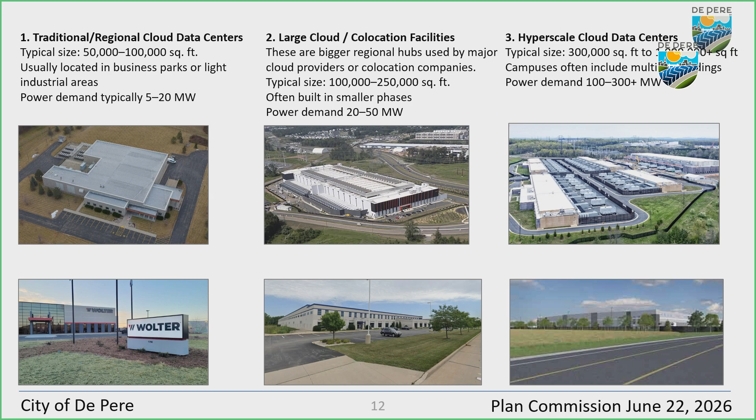So we take a look at where those would fit within the zoning code. Again, we have a low, moderate, or high impact classification. We would probably classify them as falling into that higher impact category, the hyperscale data centers. The traditional regional centers or the large co-location facilities would probably fall within a moderate impact area.

Our zoning code does authorize the zoning administrator to place them in those categories, because we don't have a specific spot in our zoning code for data centers of any scale or size. It's meant to be as high level and categorically situated as possible. When we drafted this, the proliferation of data centers wasn't where it is today. So if we do come back with something, it would probably be with a more detailed and finite approach defined, so we don't have that loose definition.

If one came in today with any proposed size and scale and we placed them into a zoning district and they wanted to challenge that, it would come to you as the Plan Commission. So I just want you guys aware that our interpretation does exist for a reason, but there are avenues if they don't agree with the interpretation. And if they don't agree with your interpretation, then it goes to the courts. So just want to make you guys aware that there are avenues.

But in this case, again, we don't have a specific line item in our zoning code for data centers, so we would likely classify them into one of these 3 categories. And again, this is just our loose discussion of where they would likely fall. So coming back to this, where would that fall within the city?

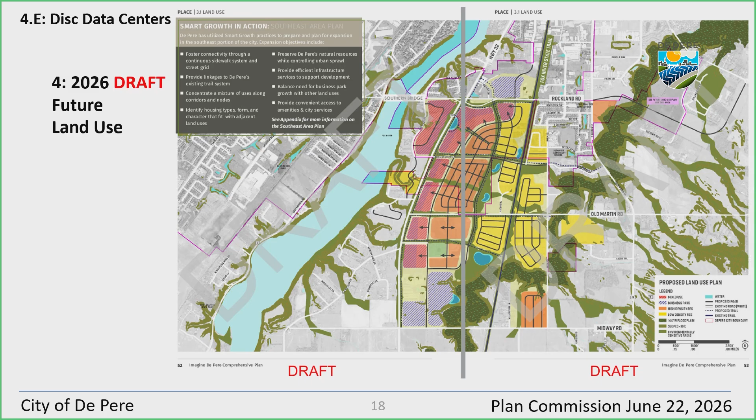The moratorium is a very specific tool authorized by the state in the state statutes, and you have to follow very specific standards. A moratorium must be tied to a legitimate government purpose. You can't just put a moratorium out there because you don't like a development.

It has to be temporary and reasonable. You can't just go after one targeted user—it has to be for a classification. So if somebody comes in and says, I want to do something, you can't then retroactively throw a moratorium in their way. It has to be thought out and planned. It cannot conflict with the state statutes, and it must be consistent and non-discretionary, non-discriminatory in its use.

And so with that, if we want to have the discussion here tonight, if you wish to move forward with it, we would come back in July with an actual proposed ordinance that you could then forward on to the Common Council. At that point, there will be a 30-day public hearing component tied to it, and then if ultimately the council wants to adopt it, it would then be adopted. We would tie it to that 12-month time frame.

This gives us the opportunity to evaluate and finish the comprehensive plan, but also do additional research into the regional impact for a data center. When I say data centers, it's probably in our best interest to investigate even the smaller scale data centers in greater detail, because they'll start to grow as well. These cloud-based data centers are probably going to grow over time, but maybe not to the scale of a hyperscale data center. So with that, staff is available for comments and any questions.

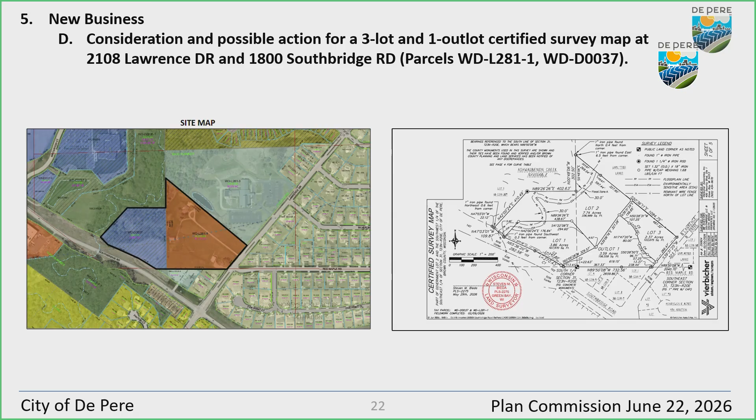New business, Item E, consideration, possible action for 3 major design exceptions from Zoning Ordinance Sections 1491-3A, maximum minor materials for surface areas, 1491 Table 9.1, allowed major facade materials, and 1491 Table 9.1, allowed minor facade materials at 2015 Venture Avenue, parcel WD-D0077.

Peter, thank you. This is for a proposed development on Venture Avenue. There are 3 buildings on this proposed site. A formal site plan has not been submitted yet. The applicants are requesting a potential design exception so that they can proceed with designs for their buildings. This particular site has 3 buildings on it: one is an office and warehouse, and the other 2 buildings are warehouses.

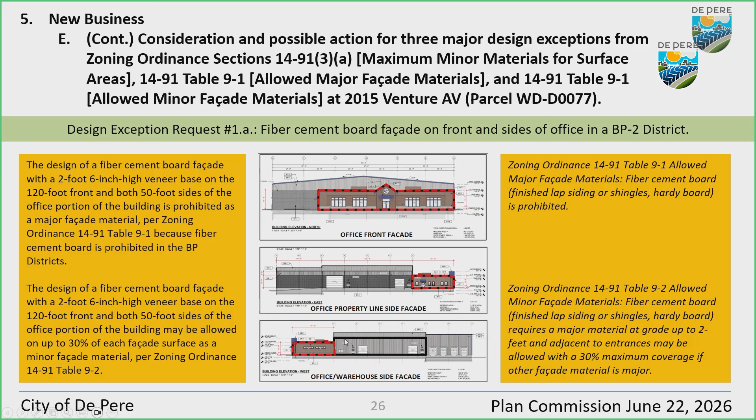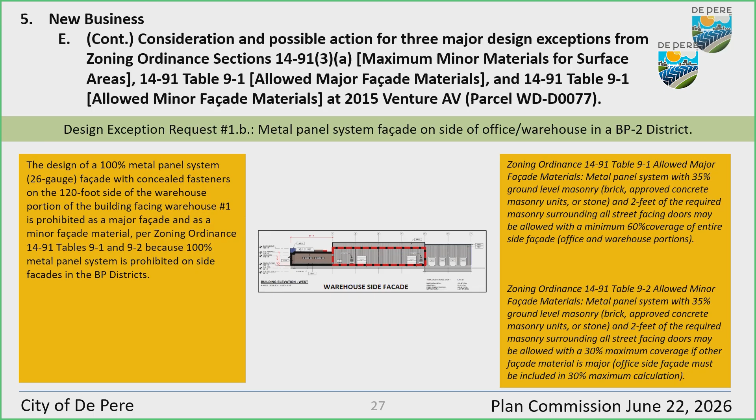Moving to design exception number 2, the middle building referred to in the site plan as warehouse number 1. On the two facades, the front facade uses masonry and metal above it, exceeding the minimum requirement. So the front facade is okay, and the masonry wraps around about 30 feet on each of the two sides of the building.

That's where you can see the dark area around the overhead doors, which is completely allowable. As it continues, the remaining area, outlined in red on the two sides, can have metal with only about a 2-foot base for up to 30% of that facade. The rest needs to comply as a major facade material, but 100% metal doesn't meet that criteria. That is the number 2 design exception request.

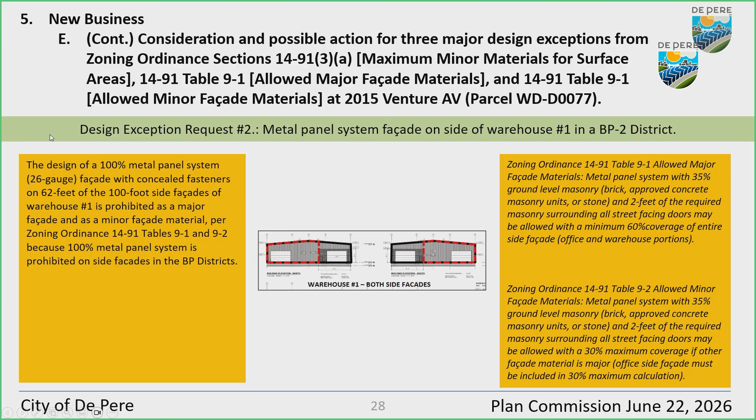Very much like number 2, request number 3 is for the third warehouse, identified as warehouse number 2 in your site plans. The southern end building has masonry going all the way across, which is fine. The space in between the two buildings has the same scenario as the other warehouse, with 100% metal on that two-thirds area. I want to point out that they used more masonry than required on the street-facing facade, which is part of the reason they're asking for the 100% metal.

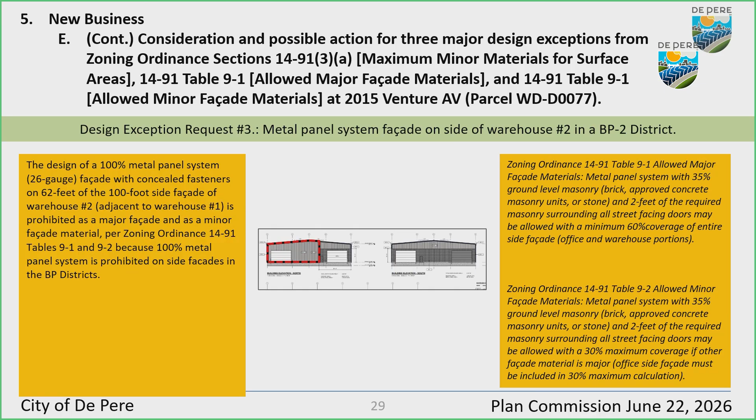From a zoning code standpoint, I can't approve it because they used more masonry in one area and less in the other. Those are the three parts of the design exceptions being requested, and I think that's the end of the slides I have.

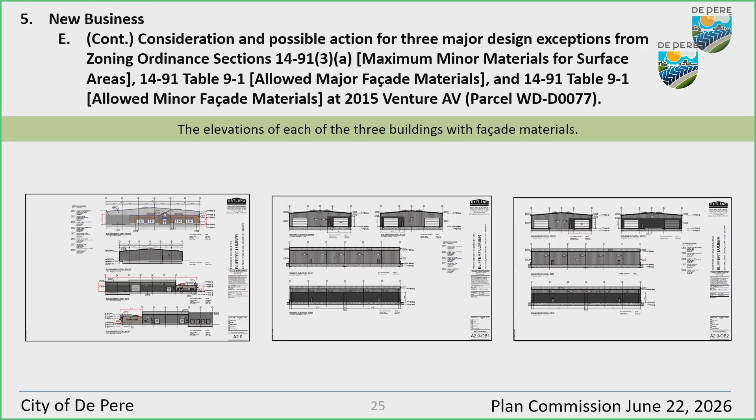I just want to add one more thing, and Peter did a great job describing it. The Finance and Personnel Committee has seen this item as well, and one point that came from Development Services staff was about the building orientation. They originally positioned the buildings in a different direction, almost turned 90 degrees, so less of their facade would face the street.

That orientation would have left their outdoor storage area visible from the public, almost in their side yards, which wouldn't have met code requirements. So one of our code requirements, almost as a trade-off, pushed their buildings toward the street. They added the additional brick facade material at 100% so they could keep the outdoor storage behind their buildings and not violate our outdoor storage ordinance.

The Finance and Personnel Committee has seen some of these concepts, but I want you to know that this change was requested by the economic development side staff so it would help meet the code requirements as well. That's the additional caveat.

Thank you. It's a lot of information, a lot of variances in one little area. Design exceptions, don't use design... exceptions. I'm sorry.

To get a ballpark idea of exactly where this is in proportion to potential residential, is there some different kind of map you have that shows it? Let me see if we have anything.

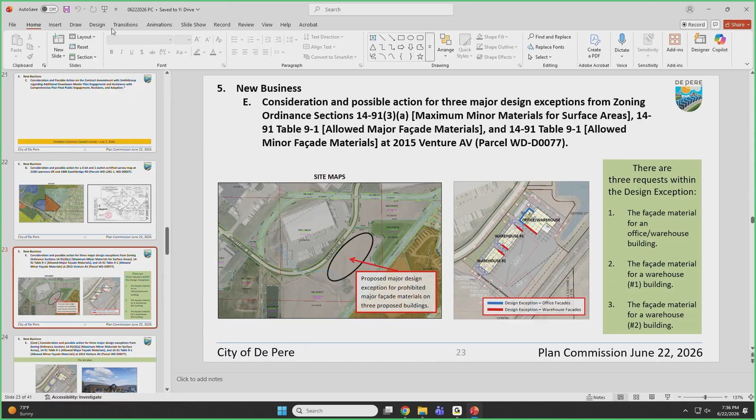To also give you some context, for those that may have seen the ribbon cutting last year for EDL Packaging, that was in our business park that opened up last year. This is immediately to the south of it. To the east is the railroad tracks, and behind that is the mobile home park that's back there.

So Devin, is that your district? No, it's a little further south than him. That would be the others, right? Yep. Okay, thank you. All right, questions, comments?

What do y'all have? Again, we have three of them here, well, multiple ones, facing the railroad. So we're saying there were attempts made to make it so it wasn't that obnoxious on the front side that people could see. So there was an attempt there. I shouldn't use the word obnoxious, that's not fair, but to not be as in compliance.

Yeah, I think they've done a pretty good job on the front, setting aside the office building, with the warehouses themselves being 100% masonry front. They didn't have to do that. They could do the minor material on the bottom and metal up top. So there is opportunity for them to do that, as some others in our business park have. They've elected to request from you guys the opportunity to put more of the materials on the front and more of the metal on the side so that it preserves the facade a little bit more.

Now, the other one, as Peter mentioned, is the use of the fiber cement board. It's typically not something we've allowed in the past, but if you saw in their packet, it's part of their brand, and they're requesting the use of the material because it is their brand. Very similar to if you drive down Highway 41, Wisconsin Building Supply almost has the same type of fiber cement board, so it's kind of the industry standard for a supply house to be doing that. That's their request, and that was in the information provided to you in their narrative format.

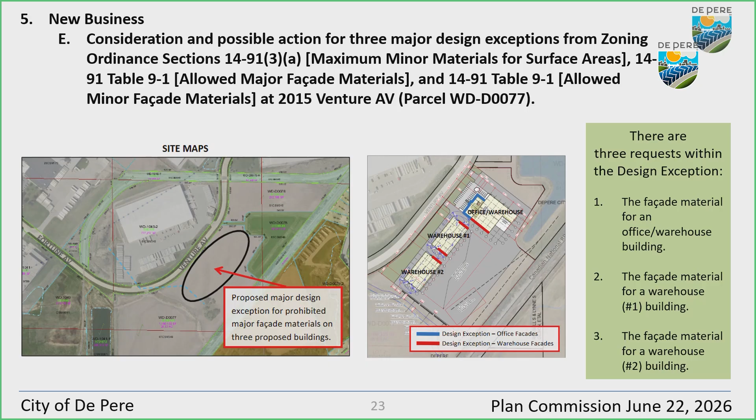Is there a life expectancy on that material, the fiber cement board? It's obviously a lot more than vinyl siding like you'd see on a normal residential house. It is actually a fiber cement product, so it has cement in the material itself, and then it's painted. Unlike masonry, if you paint masonry you're going to have staining issues, but if you repaint fiber cement it looks exactly the same as the first day you installed it. So the life expectancy of the material is similar to concrete, and the painting is similar to painting over something with the same finish.

Can one of you show the office again? The picture of the office? It looks nice. Sure can. Right there? Okay.

And that's the material, right? Yeah, it would be like a, I don't want to say cedar shake, but it's more of a consistently brown finish siding look. They have multiple stores across Wisconsin, and all of them have this similar aesthetic look, the blue trims, the wood siding. So that's the reason why they're pushing for this design exception, to create brand consistency.

With the smart board, or LP Smart Side, or the fiber cement board siding, they're able to achieve that. If they go with a full masonry veneer, which would be a major facade material, it kind of gets away from that. I think this is a little more interesting too, in the variation of materials versus it being 100% masonry. So that was kind of our take on it, more or less.

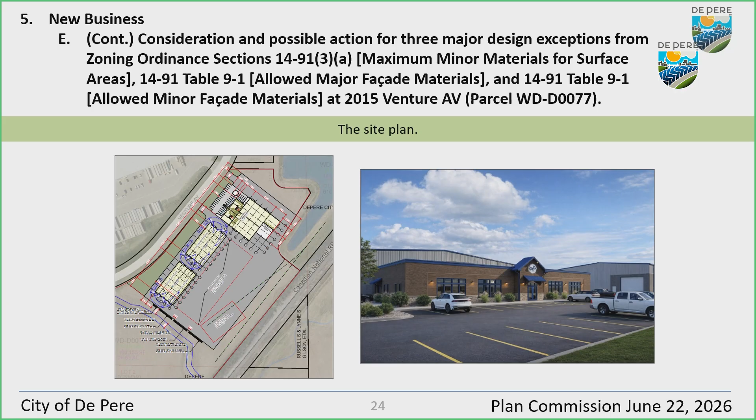Okay, that's cool. Of course, you guys are going to give a recommendation, so it's up to us. Other questions while it's open? Anything on the warehouse? Any questions there? Okay, I think we're all good. Anything else you want to add? Nope, that was it. All right, thank you very much.

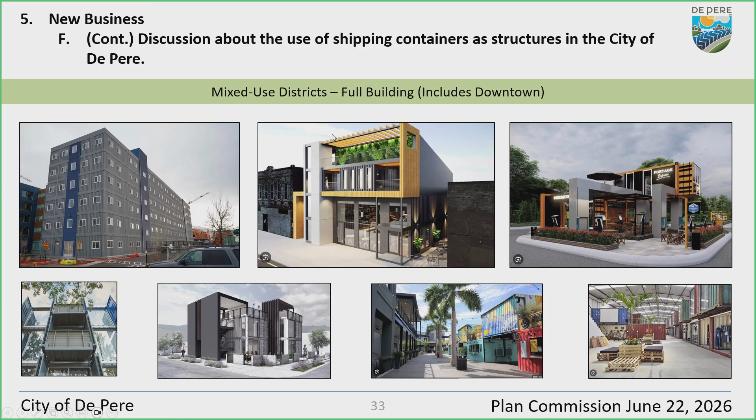Every time I put in the word warehouse, I kept getting this picture, so I felt it deserved a spot on my slide. It's basically an arched roof with a double decker of a shipping container supporting its base on each side. For some reason, this picture just pops up every time I type in that keyword.

So I think what we could have a discussion on is, is this a direction we'd like to go? Is it something that we would like if it maybe was more oriented towards color or blended with facade materials? Do we want to say yes to specific districts or no to specific districts, and the like? So with that, I kind of throw the ball back to you.

Throw the ball back to us, to have a conversation. So I brought this to them. Kim and I talked about this and said, why don't we just have a discussion before we go much further, so they don't dive into all kinds of work when it may not be needed, or maybe it will be needed. Remember the last meeting? Tom is here. He brought the concept of doing a shipping container behind Pasquale's and the eventual new Nicolay Ale Works. And we thought, let's pause on that for a second, at least have a conversation on what our feelings are about shipping containers in these particular areas.

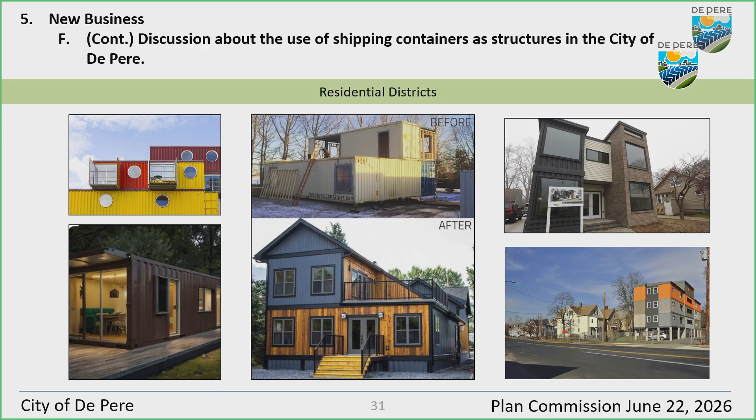They're great, you know what they're good for? Shipping, duh. Right, that's kind of how I feel about them. I don't like the look. Now, I don't dislike some of the things they've done to configure them, but it's like a little pole barn that we're going to put downtown De Pere. Don't like the idea at all.

If you have a concern about historical context and whatever, and we're deciding where our shipping container is going to go, I just don't think it's a look for the city. Someone could convince me otherwise, or the reuse, recycle thing, I get that, but I think it's a shortcut on building. Any of those things you did, you could just build, and then we don't have shipping containers. But that's just my opinion, not to say they're bad or evil, I just don't care from an aesthetic design standpoint how they look.